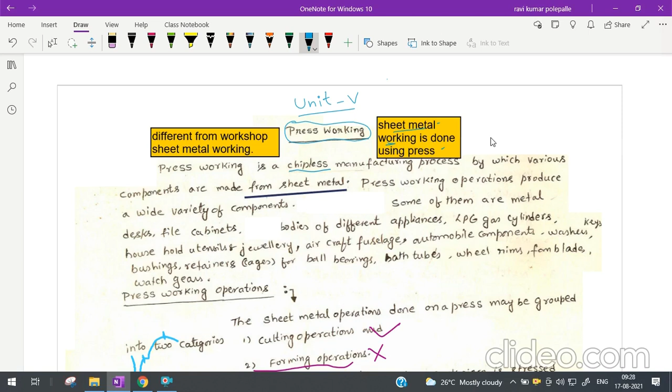This press working process is different from sheet metal working in a workshop. The chief difference is that we carry out this sheet metal working using a machine which we call a press.

Press working operations produce a variety of components: metal desks, file cabinets, bodies of different appliances, LPG gas cylinders, keys, household utensils, jewelry, aircraft fuselage, automobile components, washers, bushings, retainers or cages for ball bearings, bathtubs, wheel rims, fan blades, watch gears, etc.

So many different types of components - wherever sheet metal is involved, we can make them using the press working process.

What are the different press working operations? We can categorize them into two types: the first is die cutting operations, and the second is forming operations.

The basic difference between these two is that in die cutting operations, cutting action is the main activity. To cut the sheet metal along a particular profile or contour, the workpiece must be stressed beyond its ultimate strength.

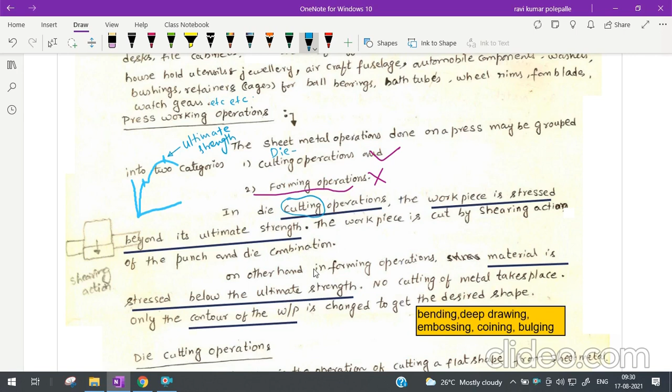In die cutting operations, we have to reach the ultimate strength value. On the other hand, in forming operations, we never go up to ultimate strength - our operations may cross the yield strength, but we never reach the ultimate strength. That is the main difference.

Let us look at the different die cutting operations. But before that, let us note the forming operations. Some of them are bending, deep drawing or cup drawing, embossing, coining, bulging, and also spinning.

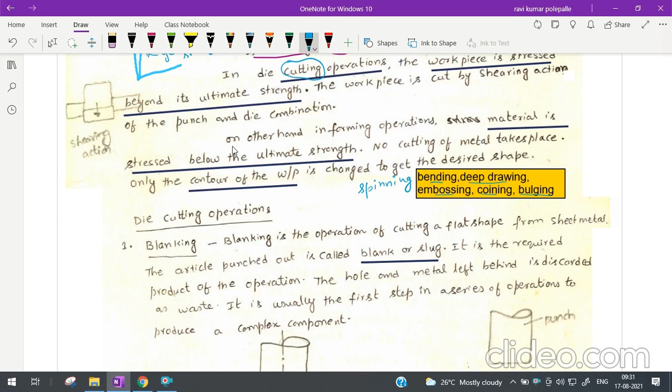Spinning can be hot spinning or cold spinning, and it also comes into the category of forming operations. Now let us look at the die cutting operations.

There are different die cutting operations. The primary or first operation of importance is the blanking operation, where a flat shape is produced from the sheet metal.

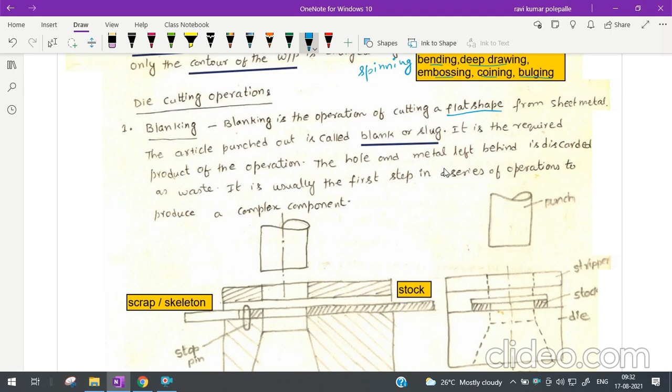This punched-out article is called a blank or slug. The hole and the metal left over is discarded as waste, which we also call scrap. Blanking is usually the first operation in a series of operations to produce a complex component.

Looking at the basic diagram: to the right side, the material being pushed inside is called stock. The material that falls down is called blank, also known as slug. What comes out to the left side is called scrap or skeleton.

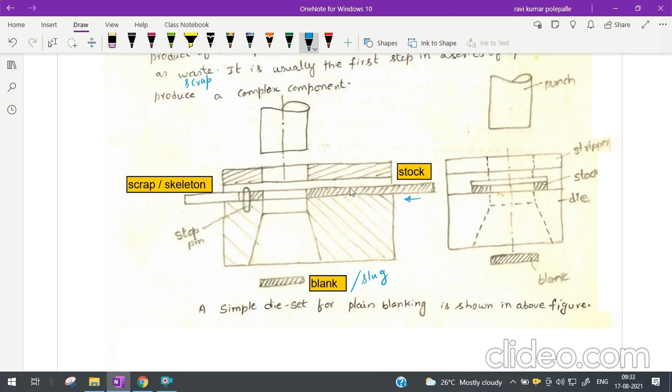Piercing operation is a cutting operation where holes are produced in sheet metal. Punching is similar to blanking, except that in punching, the hole with its skeleton is the desired product, and the material punched out is the waste.

So you can see the difference: in piercing, the material punched out is the scrap, and the remaining material is our product. On the other hand, in blanking operation, what is punched out is the product, and what remains is the scrap.

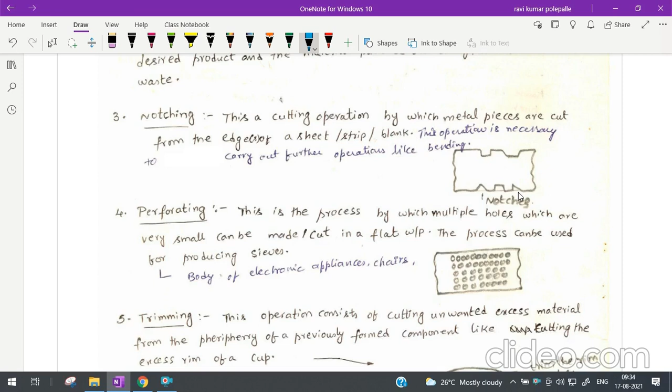Next is notching - the operation where metal pieces are cut from the edges of the sheet metal. This operation is necessary to carry out further operations like bending. On the edge, we may cut off some portion, and we call these notches, with the operation called notching.

Next is perforating - the process where multiple small-sized holes are produced. This process can be used for producing sieves, and additionally for producing bodies of electronic appliances, chairs, etc., where perforations are made.

So perforations are made for good or easy circulation, right?

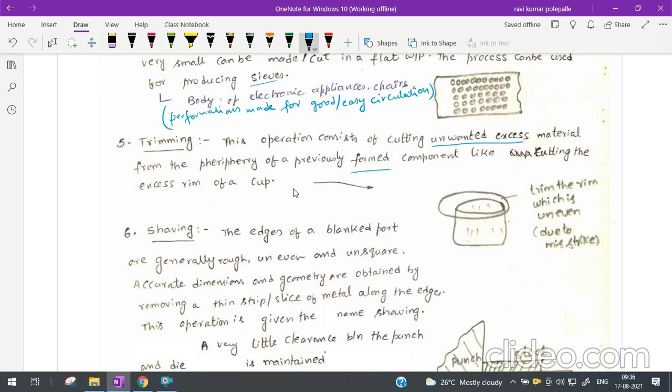Next, trimming. This is an operation where excess material is removed from the periphery of a formed component. On the formed component, you are going to remove excess unwanted material. For example, if I look at a cup, it has a rim which is uneven due to misstrike. Misstrike means the punch does not hit exactly at the center of the disc; instead, it is offset. So in that situation, you have a rim which is non-uniform, and such a rim has to be removed. That operation is called trimming.

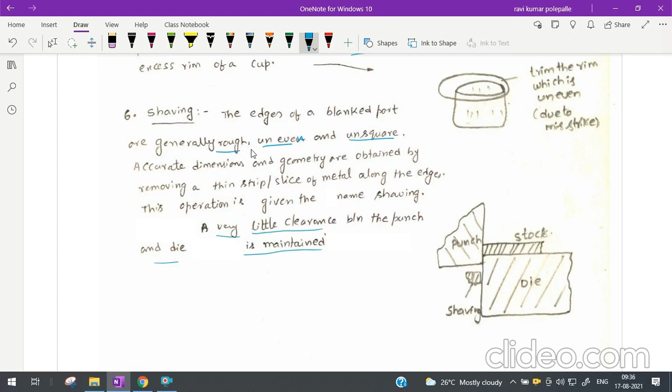Next is shaving. The edges of a blanked part are often rough, uneven and unsquare. So when we require accurate dimensions and geometry, we have to remove a thin strip or slice of the metal along the edges. That operation is called shaving. It has to be understood that a very small clearance between the punch and die is to be maintained, because this is a precision operation where we obtain smooth, square edges.

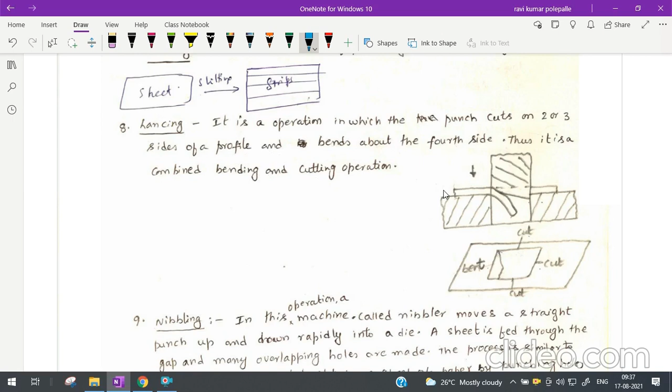Next, slitting. Slitting is the operation of producing thin strips throughout the workpiece. Lancing is an operation in which the punch cuts on 3 or 4 sides, or at least 2 or 3 sides of the profile, and bends about the 4th side. Thus it is a combined bending and cutting operation. The punch moves down, cuts on three sides, and on the fourth side produces a bend. So this is a bent portion, known as lancing.

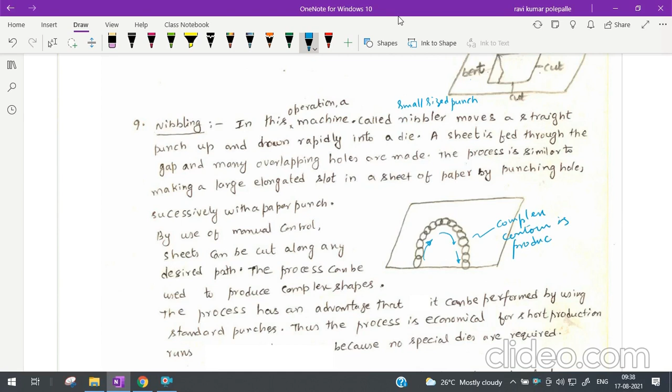Next, nibbling. This is an operation where you move a small punch, which we call a nibbler. It continuously moves up and down. The sheet is fed through the gap, and many overlapping holes are produced in this manner. The nibbler moves along a path and makes multiple overlapping holes. On account of this, it is possible to punch a contour using a nibbler where the shape is complex. So a complex contour is produced, and this is the operation we call nibbling.

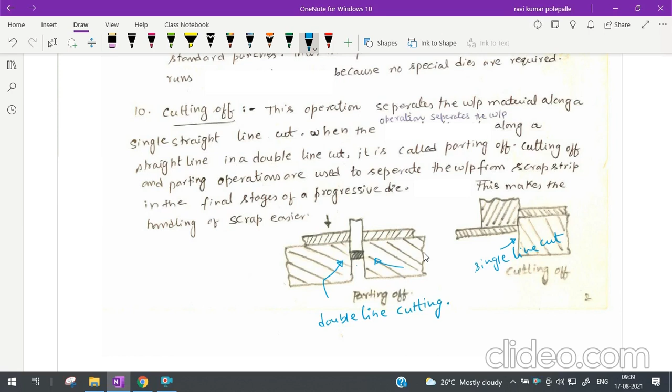Next we have the operation cutting off. This is an operation where separation of material takes place along a single line, so this is called single line cutting, and that is called cutting off. On the other hand, we may have double line cutting, where material is cut along two places; that is called parting off. So this is a sort of double line cutting. These cutting off and parting off operations are required in the last stages of cutting.

When we talk about materials suitable for press working, we generally go for soft materials, not too hard. We should differentiate materials based upon whether it is a die cutting operation or forming operation. Generally low carbon steels and non-ferrous metals like copper and its alloys, aluminum, titanium, zinc, etc. are more preferred for press working. The starting material is in the form of sheet or strip, with thickness from 1/10 of a mm to 8 mm. During press working, the sheet wall thickness is generally constant and varies only by a small amount. The metal must be free from scales before sheet metal working; the scale can be removed by pickling.

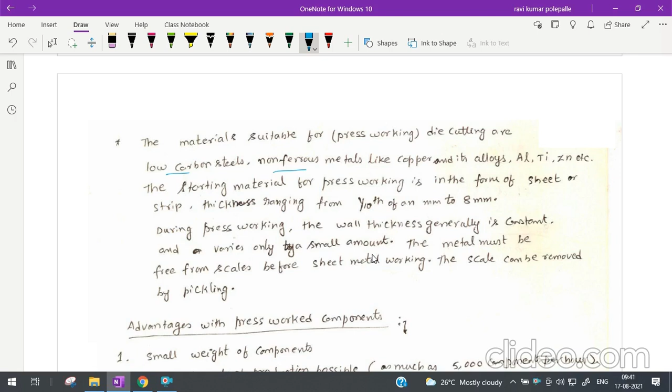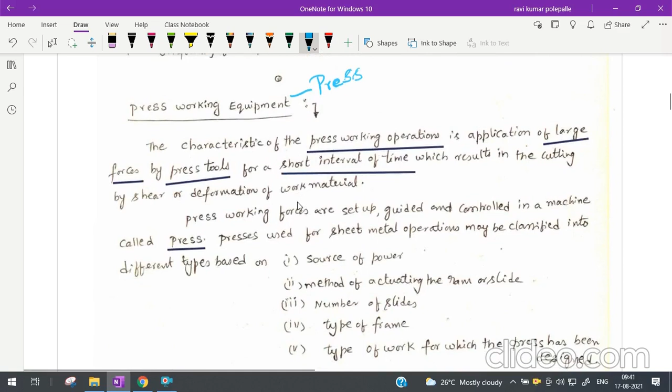When we talk about the advantages of press working components: small weight of the components, very high rate of production possible, as much as some 5,000 components per hour, lesser labor requirement, higher utilization of machine, and finally low production cost. Also good size and shape accuracy, which generally does not require any further machining, and lastly, uniformity of components. Next, press working equipment.

When we talk about the principal machine used in press working, we call it a press. The requirement of a press is to supply a large amount of force on the press tools, that means tools attached to the press, for a short interval of time, which results in cutting by shear or deformation, that means purely plastic deformation of the work material.

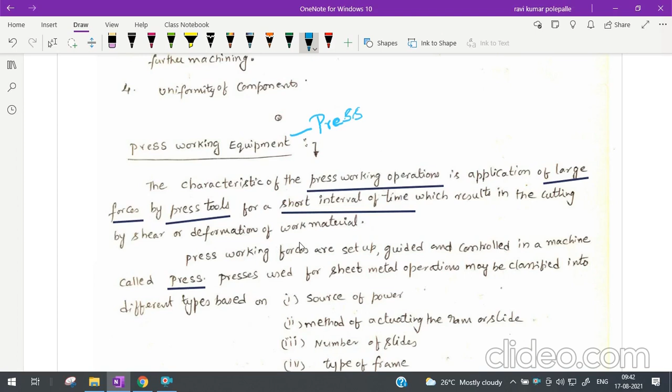The press should have facility to set up the forces and guide them in a controlled manner. There are different issues related to press, such as source of power, number of slides, and type of frame.

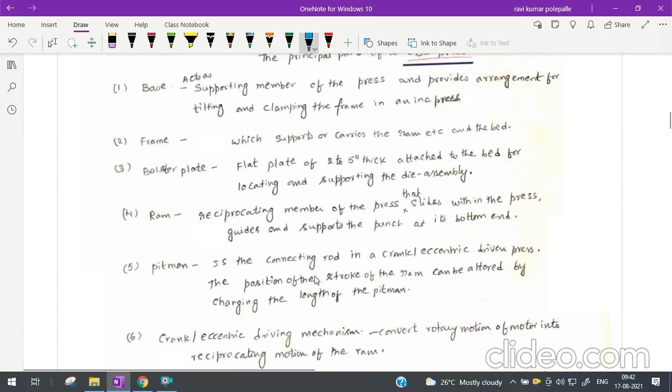Here you can see a typical press, which we call OBI press, open back inclinable press. This OBI press has so many parts. You can find a flywheel which stores the energy, and it is connected to a motor. From the motor, it receives energy and keeps on rotating, storing the energy. Whenever the ram moves down, the energy will be supplied by this flywheel.

You have ram to which the punch die assembly is attached. Next we have a gap at the center, which is provided to push away the component from front to back if necessary.

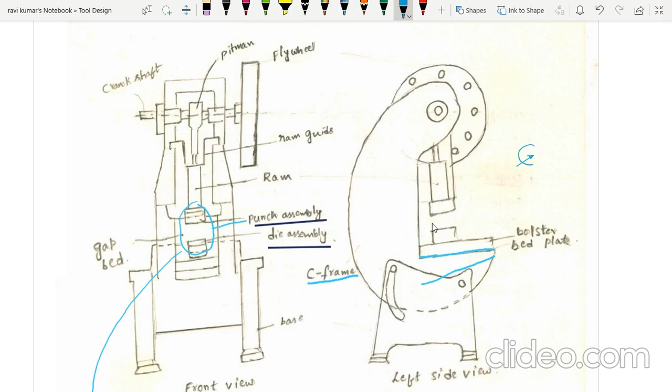Same way, we have the press more number of times as C type of press. We call it a C frame, which permits us to feed the components from this side, something like a C shape. Into this C, from left to right or right to left, we can push the component as the work is over, so as to get the next component. Further, we can find the RAM and the die set, that means punch and die assembly.

We have this frame which is adjustable. Actually it is called open back inclinable press, meaning its back is open. Further, it is inclinable, so we have a slotted screw arrangement for tilting the machine.

Next we shall talk about a simple die set. These are the parts of the die set. We can find a punch and a die as the two main parts. This punch and die block together act as cutting tools. In addition, we have arrangement to move the punch down by the movement of the ram in a controlled manner, for which we have guide bushings. The punch holder moves around this guide post with the help of this guide bushing.

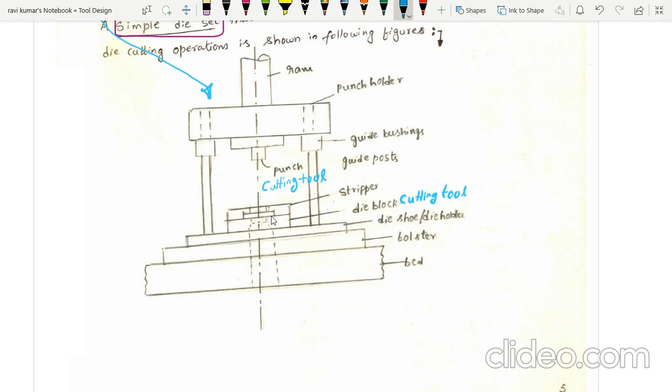Regarding the other parts, we have a die block fixed on the die holder or die shoe, below which we have a thick plate called the bolster plate, and below it we have the machine bed. We also have stripper and many other parts. This is only a simple die set.

Now let us talk about the shearing action in die cutting operations.

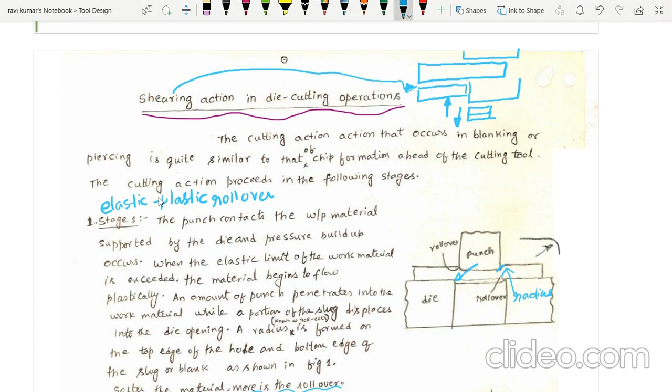Let us continue with the discussion on the shearing action in die cutting operations. The cutting action that occurs in blanking and piercing is similar to that of chip formation ahead of the cutting tool. The cutting action proceeds in the following stages.

We call this shearing action. The reason is we have a press with a punch which moves down over the die support, where the sheet metal is placed. There is a sort of sliding action at the place where the shearing takes place.

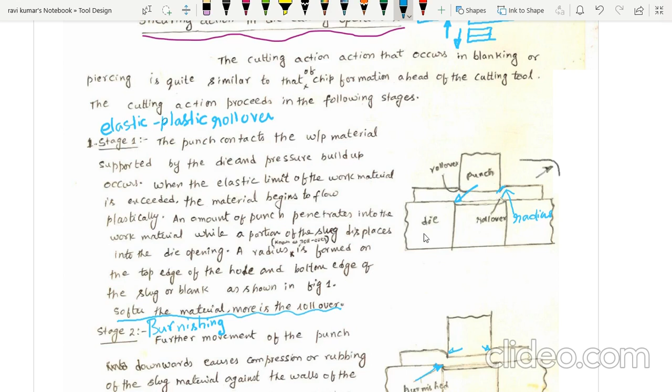Actually it proceeds in stages. If you look at the stages, the first stage we call elastic-plastic rollover. In this stage, we find that a sort of radius is formed around the punch corner as well as the die corner in the sheet metal, called the rollover radius. This radius will be larger when the clearance is larger. Similarly, if the material is more plastic or soft, we find this rollover radius to be a larger value.

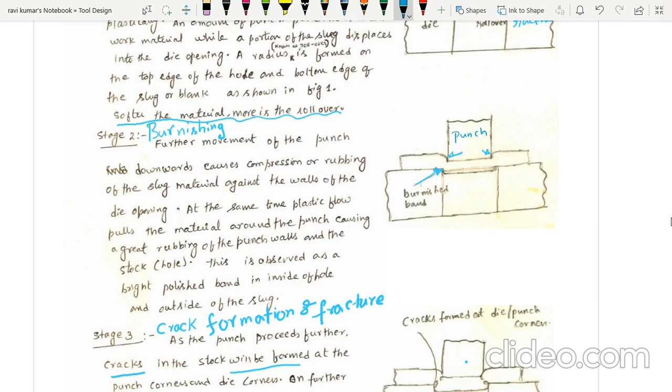The second stage is called burnishing. In this stage, there is a sort of penetration of the punch into the die block, into the sheet metal. Similarly, there is rubbing of the sheet metal by the die walls, as the work material penetrates and moves more closely into the die opening. This is known as burnishing, and it will be observed as a bright polished band inside the hole of the stock material produced, as well as on the outside of the slug.

Next, crack formation and fracture.

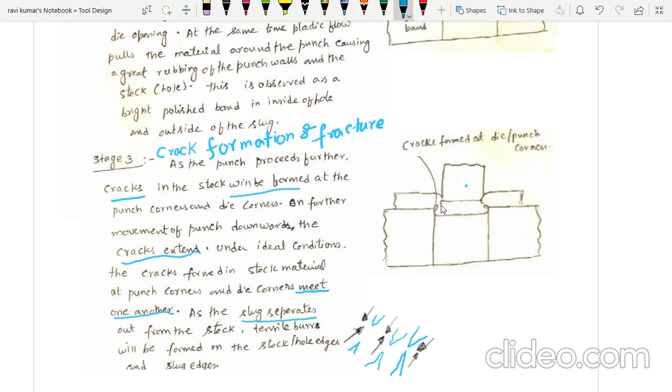As the punch proceeds further down, cracks are produced at the corners. Around the punch corners in the sheet metal, there is a sort of crack formation. The cracks are far apart in the initial condition, and as the punch moves down further, the cracks proceed towards one another when the clearances and other conditions are favorable. Under favorable conditions, the two cracks approach one another very fast and separation of the material takes place.

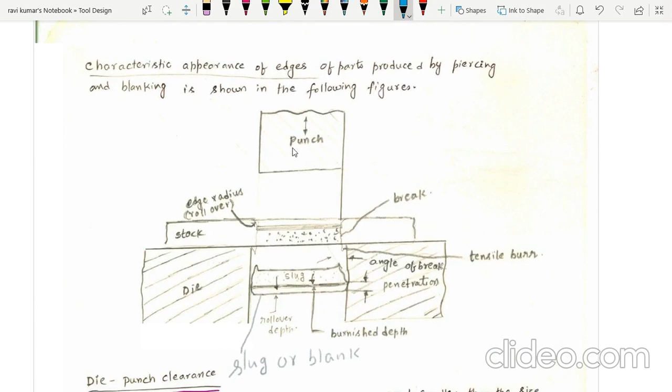Slug drops into the die opening while stock material is ready to be disposed. This is the characteristic appearance of the edges of parts produced by piercing and blanking operations. As the punch proceeds down, it produces a surface something like this. Right, this is how the appearance will be.

One may observe three important regions which are characteristic of the three stages in cutting. First we observe a rollover radius, both on the hole that is produced as well as the slug. We call this the rollover depth. Then we find a burnished region, this polished, darkened region, which is nothing but the burnished band.

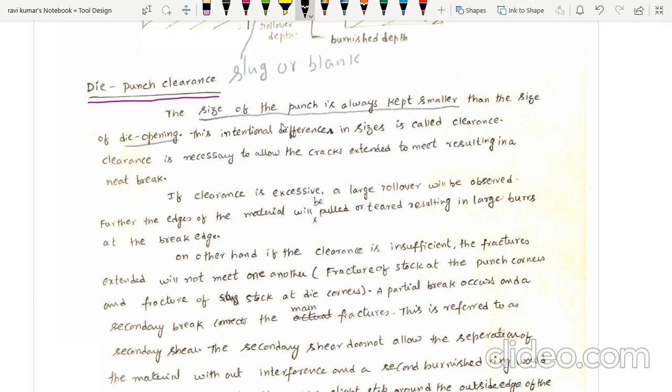Next, let us talk about the die punch clearance. All of us accept that the size of the punch is always kept smaller than the size of the die opening. This intentional difference we call clearance. Clearance is necessary to allow the cracks to extend and meet one another so that the break is neat or clean.

If the clearance is excessive, what happens? Simple, excessive rollover shall be observed. So when clearance is excessive, the rollover observed shall be excessive. Further, edges of the material will be pulled or torn, meaning we are going to find large burrs.

On the other hand, when clearance is insufficient, what happens? We find that the fractures extended will not meet one another properly. The crack formed around the punch corner in the stock material and the crack formed around the die corner do not proceed towards one another. They may get offset and proceed individually.

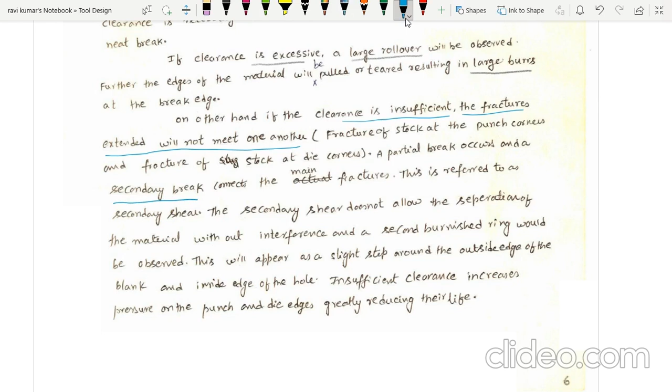Then a secondary break, which we call secondary break, is necessary to connect these two cracks. This is called secondary shear, and this is not at all expected. We find a second burnished ring as well as a sort of interference of the material. This insufficient clearance increases pressure on the punch and die edges, greatly reducing their life. So this is not at all expected.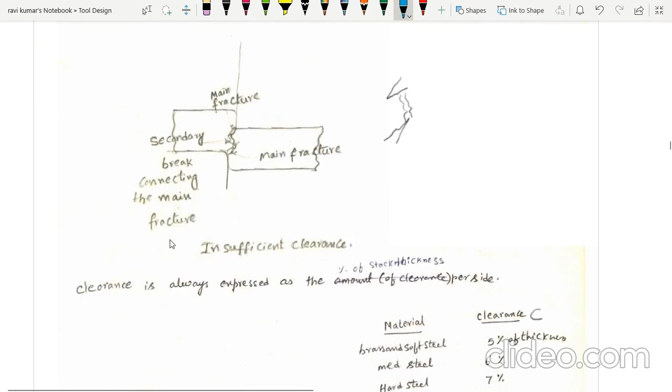So this is insufficient clearance, and this is excessive clearance. We find a primary crack, and this is another primary crack. They are not moving towards one another, so they are offset. You have a secondary crack or secondary break which needs to connect them because they are proceeding individually, and they are not expected to meet in a normal manner.

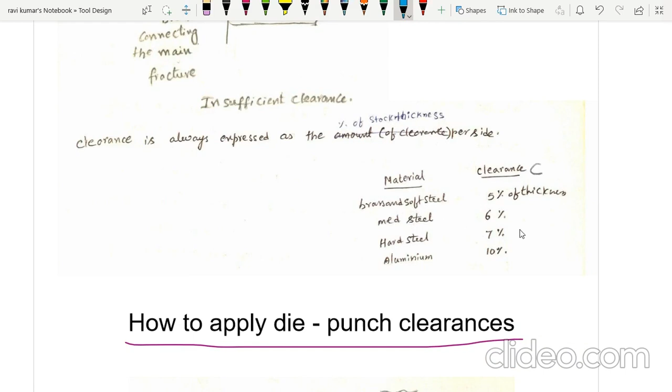When we talk about the amount of clearance, we provide clearance as a percentage of stock thickness. Generally, 5 to 10% of stock thickness per side is enough.

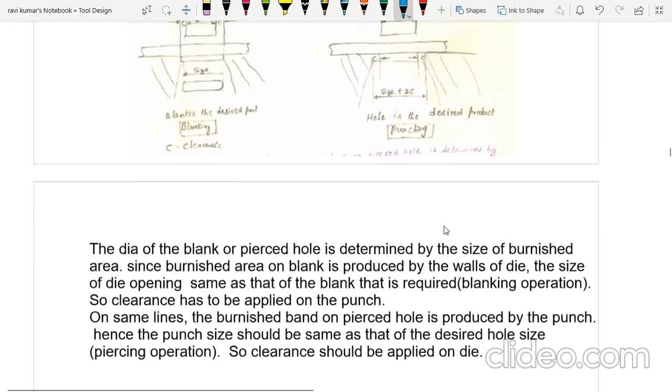Next, how to apply the die punch clearances? The die punch clearances are applied depending upon the name or type of operation. In blanking operation, we apply clearance to the punch because the size of the die opening will correspond to the size of the blank. That means the punch is made smaller than the blank size.

On the other hand, in piercing operation, the piercing hole is decided by the size of the punch. Therefore, the die opening has to be excessive compared with the punch size, or simply we may write it with respect to blank size.

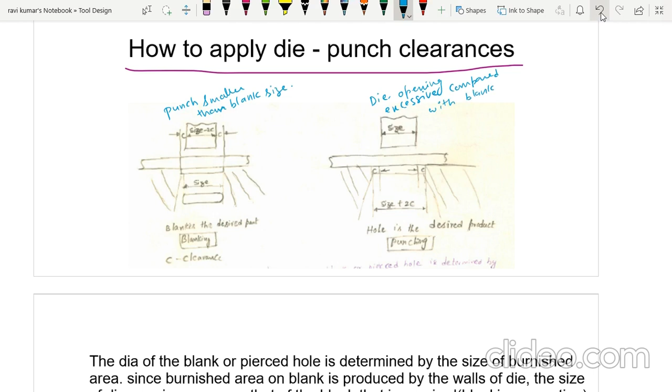So the die opening is excessive compared with the blank size, right? So this is how we apply the clearance.

So there is another clearance which we call angular clearance. What is this angular clearance? You may observe that the die walls are not straight. Part of the die wall is straight, and from there it is tapered down.

This tapering is done because whenever the punch pushes the stock material into the die opening, there is a sort of elastic deformation. Once the punch releases from the cutting action, there is going to be a sort of elastic recovery, and therefore we find that the blank increases in size.

So we find that the slug or the blank expands. This expansion in blank dimensions will make the blank stick or cling against the walls of the die opening if it is straight. If you provide a taper, simply the blank, on account of the elastic recovery, will not be able to hold against the walls because it's tapered, and it will simply drop down.

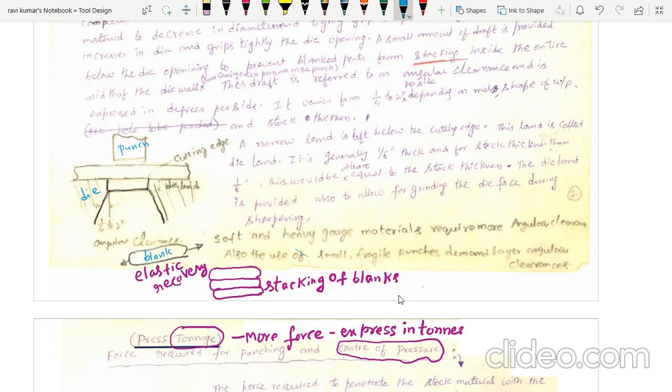This also prevents stacking of the blanks - that means blanks placed one over the other - and an increase in the punch force. All such types of problems are eliminated.

Okay, so the next discussion is about press tonnage. We use the word tonnage because the amount of force which we require is in tons - that means a large amount of force is required to penetrate the stock material.

If we try to calculate the numerical value of that force, we write it as S P T. S stands for the ultimate shear strength of the material, P stands for the perimeter, and T is the thickness of the stock material. So this much amount of force is required, right?

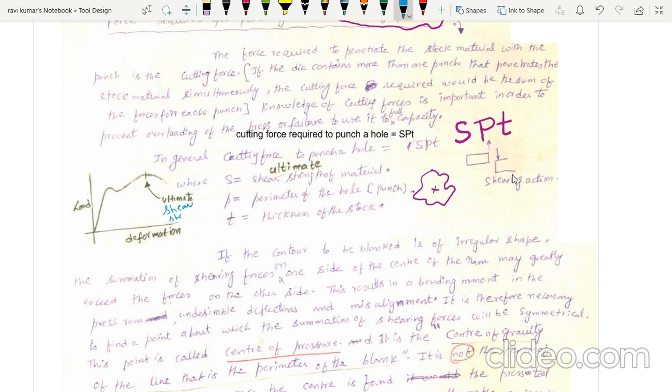One should definitely remember that S stands for the ultimate shear strength. It is not ultimate tensile strength. It is ultimate shear strength of the material.

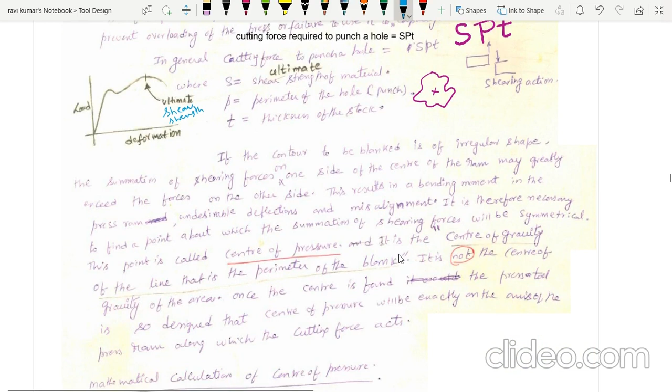When we talk about the force after it has been calculated, we should be aware of where we have to apply this force. The place where we have to apply this force is called the center of pressure. This center of pressure is nothing but the center of gravity of the line, that is the perimeter of the blank. It is not the center of gravity of the area.

Once the center is found, the press tool is so designed that the center of pressure will be exactly on the axis of the press ram along which the cutting force acts.

If we don't apply the force along this center of pressure point, there is going to be an imbalance of forces. So we may find a sort of bending moment, undesirable deflections, and misalignment. These are all different types of troubles which we are likely to face.

When it comes to calculation of center of pressure, these are the different steps. First, draw the outline of the portion to be cut. Draw the x-axis and y-axis at right angles at a convenient position. When there is symmetry, we can make the x-axis or y-axis pass through the axis of symmetry or line of symmetry.

Next, divide the cutting edges to be cut into simple line elements. Please understand, these are line elements, not area elements. Next, find the length of each of these lines.

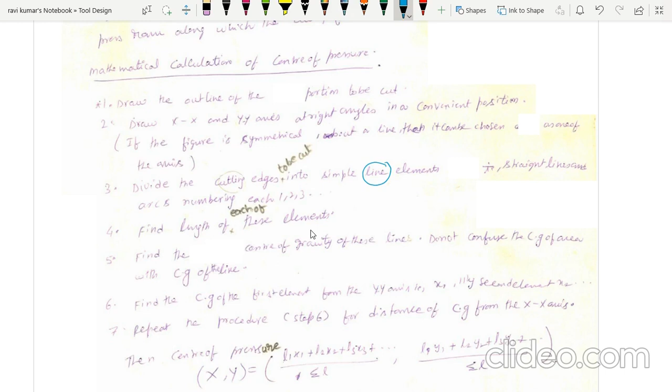Next, find the center of gravity of each of these lines. Do not confuse this with the center of gravity of area.

Next, find the center of gravity of the first element from the y-y axis, which we call x. Similarly, for the first element we call it x1, for the second element x2, and so on.

When we apply the formula, this is the formula for center of pressure: X, Y is equal to L1 x1 plus L2 x2 plus L3 x3, etc., divided by L1 plus L2 plus L3. Next, L1 y1 plus L2 y2 plus L3 y3, etc., divided by L1 plus L2 plus L3 and so on.

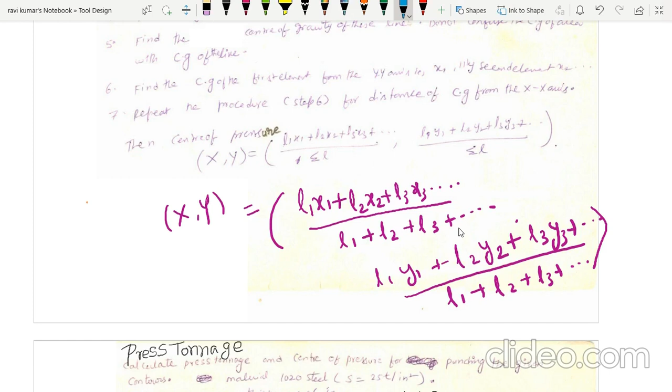So we may look at this example to see how we have calculated the center of pressure.

Next, when we talk about the methods of reducing punch forces, the methods are multiple. The first method is providing draft on the punch or dies.

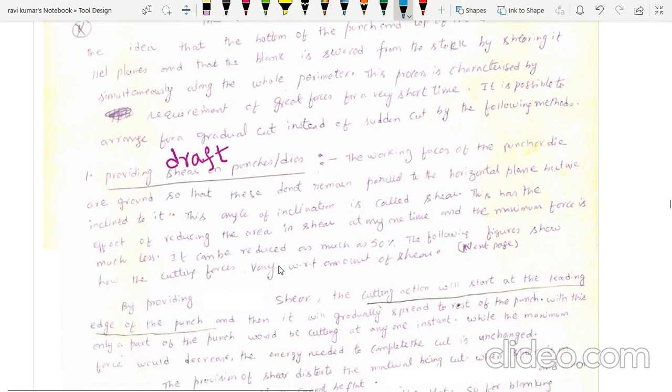This is how they look like. Instead of the punch face being straight, that means perpendicular to the axis, it is inclined. By doing this, we are able to reduce the load on the punch. Actually, the peak load is reduced, not the total force. The peak force is reduced because the cutting takes place gradually, not on the complete contour. Instead, it cuts gradually along the contour.

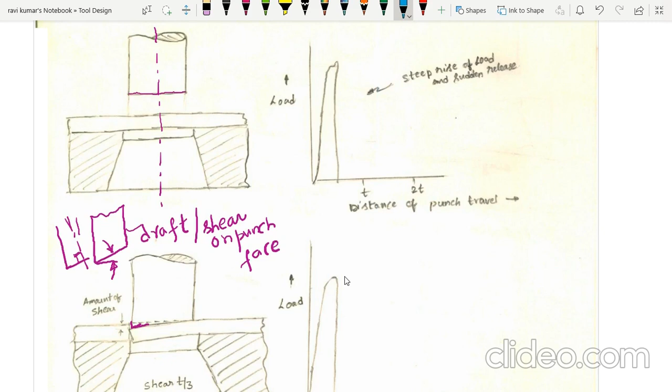We can provide different amounts of draft, say t by 2, t by 3, or even one time the thickness. In each case, the peak load is reduced and therefore the punch and die will have more life, but there is likely distortion of the workpiece. So the die opening or punch face may have a single draft or double draft, similarly convex or concave shapes.

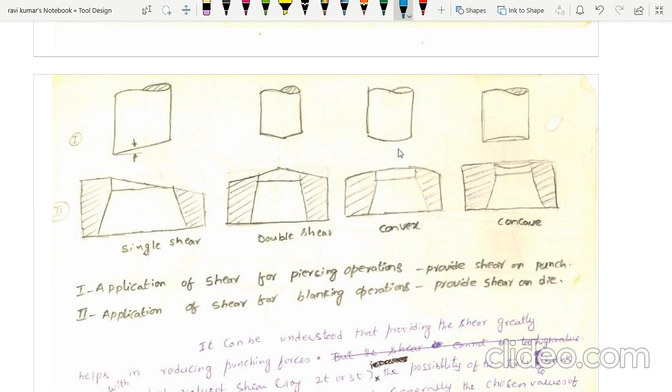Another way of reducing punch forces is staggering or stepping of punches. So punch 1, punch 2, punch 3 may be staggered, meaning once punch 1 completes the cutting, only then punch 2 enters, then punch 3 enters, and so on. This is the case when we have operations requiring progressive dies.

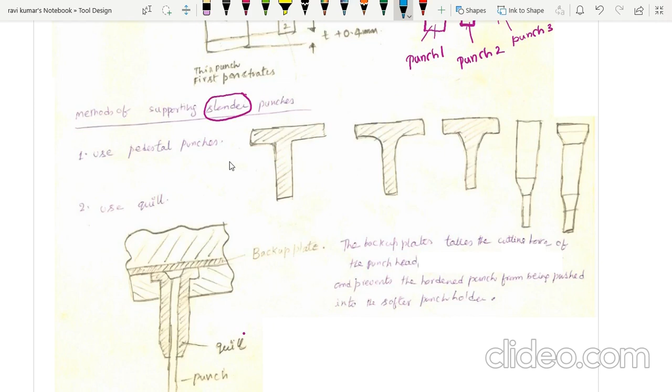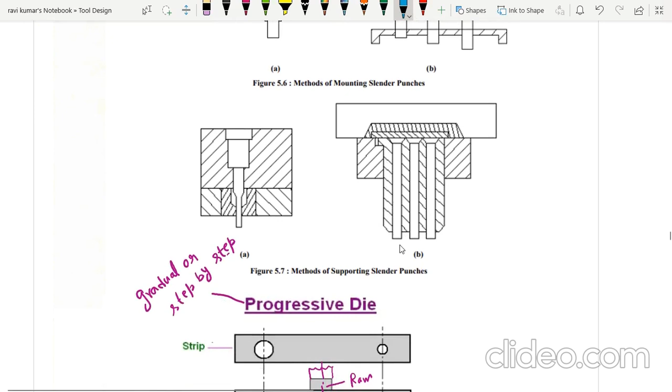Further, it has to be kept in mind that slender or thin punches have to be supported properly. So use pedestal punches, use a quill, that means a sort of supporting cylinder, likewise use a backup plate, or combine and group the punches. This is a case of staggering and mounting both, and this is a case of grouping the punches. So wherever possible, we can group these slender punches, and this will provide more support for them.

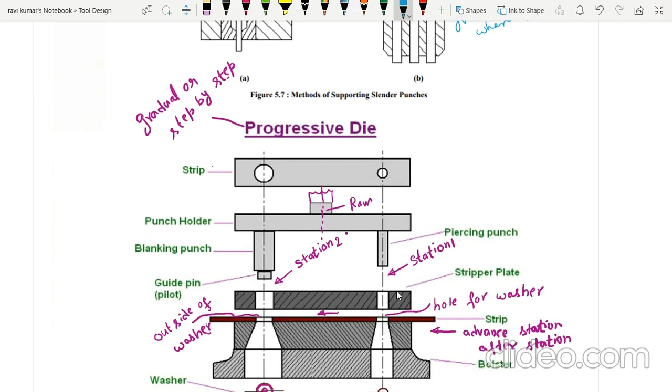So the next point of discussion is progressive and compound dies. What are these? By progressive, I mean gradual or step by step, so we produce the component step by step. Say we require a washer, something like shown in this diagram. We first need to produce a hole, and then we need to produce a separation from the stock material, meaning the outer contour is punched.

For this, we can have in one station the piercing punch and piercing die, and in the second station a blanking punch and blanking die. Once the sheet metal passes through station 1, the hole is punched, meaning the inner dimension is produced. Next, I push the stock material forward by a distance we call the advance. Now the blanking punch lowers, producing the outer contour of the component.

This is another example where multiple operations are performed across stations 1, 2, 3, 4. Station 1, a square hole is produced and three edges are cut - this is a trimming operation. Next, edges on this side are produced. Next, four holes are cut, and in the last station we perform a parting operation.

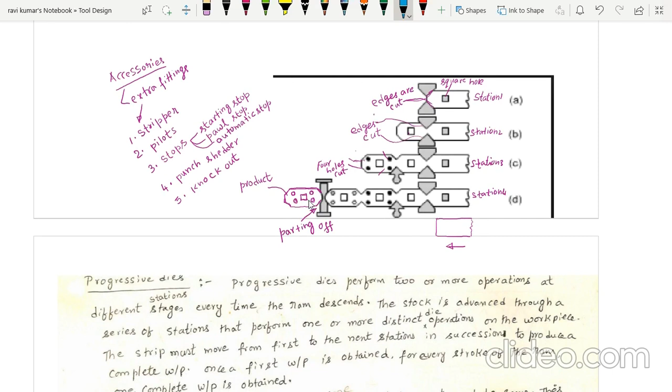So all these things produce components at a faster rate and in a controlled manner. This is called a progressive die.

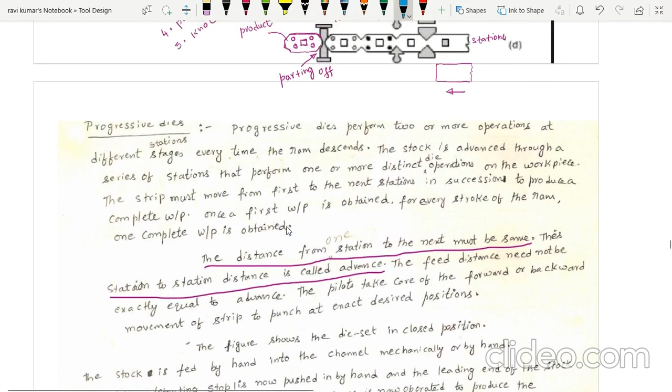For this, more accessories are required: extra fittings like stripper plate, pilots, stops - either a starting stop or an automatic stop - and sometimes a punch shedder and knockout. These two are particularly needed, and even more so in case of compound dies, which we'll discuss. This type of die set we call the progressive die set.

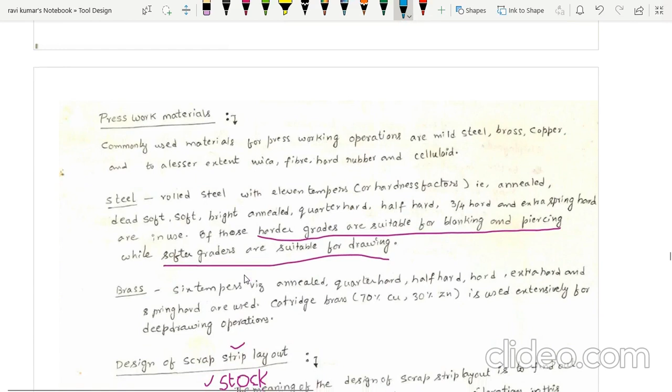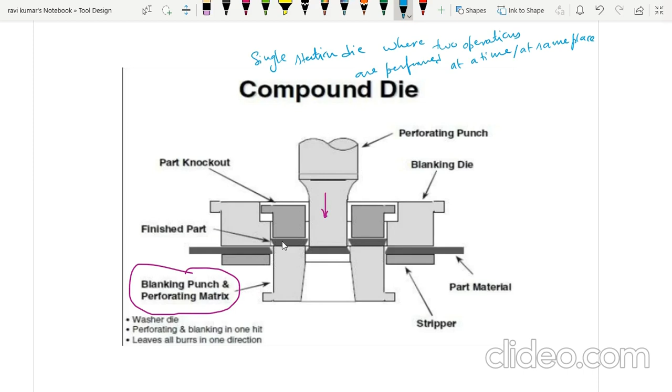So it's a single station die where two operations are performed at a time, at the same place. If you look at the construction, the center one is nothing but the perforating punch which will produce a hole, and it has some additional arrangement. This is the blanking punch and perforating die - the outer surface acts as punch for producing the blank, while the inner surface helps in producing the piercing faster.

Continuing the discussion about the compound die, let me repeat that these are single station dies where two or more operations are performed at a time and at the same place.

We may notice that the blanking punch's outer surface acts as the blanking punch, but the inner surface acts as a piercing die. This portion acts as the piercing die. Likewise, this part acts as the blanking die. You may find that the upper portion is the blanking die, and the inside portion acts as the outer surface, which acts as the blanking punch.

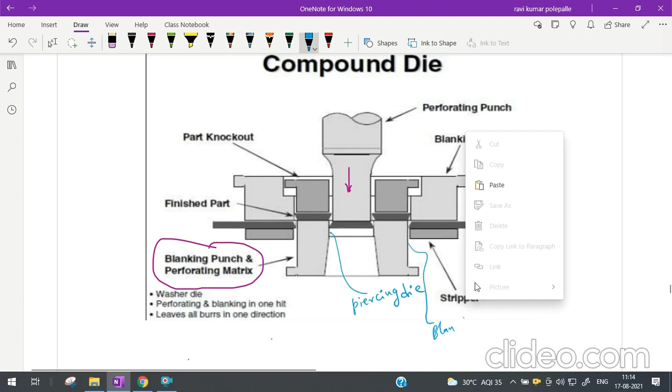So this is nothing but the blanking punch. The inner surface acts as the piercing die, and the outer surface acts as the blanking punch. That is a schematic diagram - you may not find all the information there, so this is a better diagram showing the blanking punch, piercing die, and blanking die.

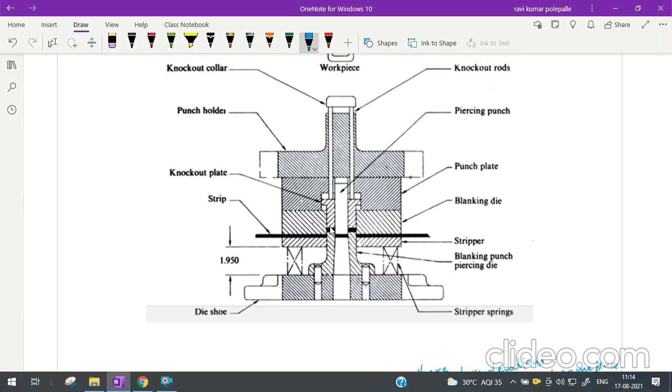In addition to this regular die and punch setup, we have knockout rods and knockout collar. The blank has to be pushed out by some additional means.

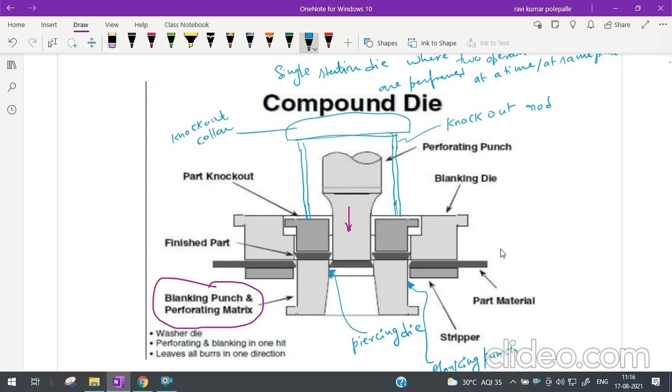One may understand that I have to push this knockout collar down so as to eject the components. This is done because the knockout collar's action is called knocking out - it has to knock out the component that has been produced. The reason is there is no tapered surface. For the piercing operation there is a tapered surface in the die, but for the outer blanking portion, we don't find any taper or draft. Therefore we have to additionally knock out the component which is sticking or clinging to the walls of the blanking die.

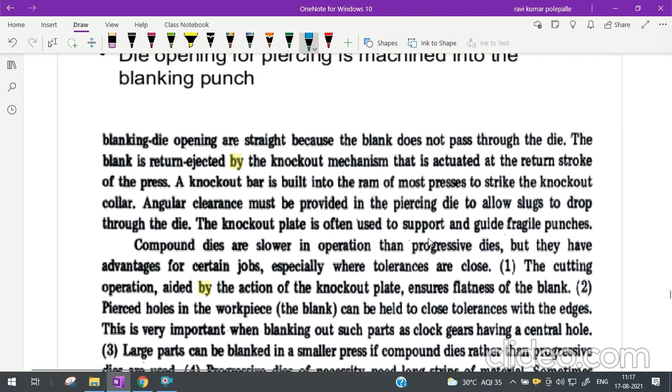This is not of much industrial importance, and may be preferred when we have loose blanks, or rather small pieces instead of a strip or a sheet.

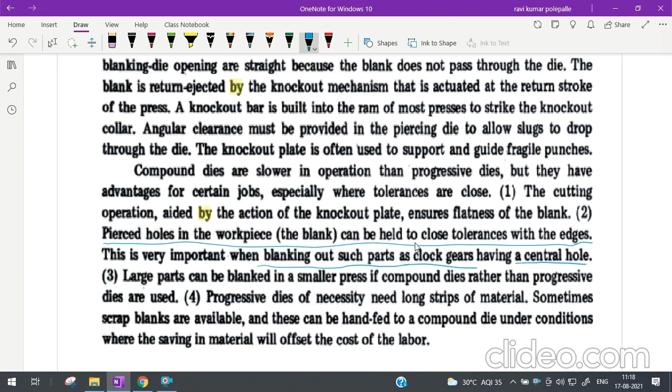Further, we have an advantage in this case - the dimensional accuracy is very good. Pierced holes can be held to close tolerance with the edges, since both inner and outer surfaces are cut at the same place, so the tolerances obtained are very good. For clock gears with a central hole and similar applications where tolerance and accuracy are important for small jobs, we can prefer the use of compound dies.

This completes the discussion on compound dies. Finally we may discuss the scrap strip layout - what is the scrap strip layout?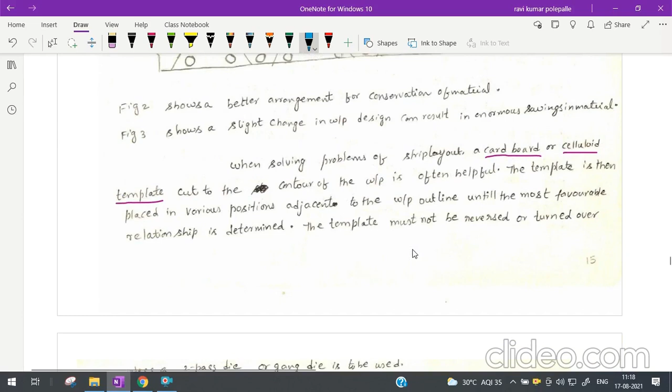The scrap strip layout is connected with proper usage of materials in progressive die setups. In progressive die setups, the component progressively improves in features as it passes from one station to the next. In such a case, the stock strip which we are feeding should maintain certain requirements - what are those requirements?

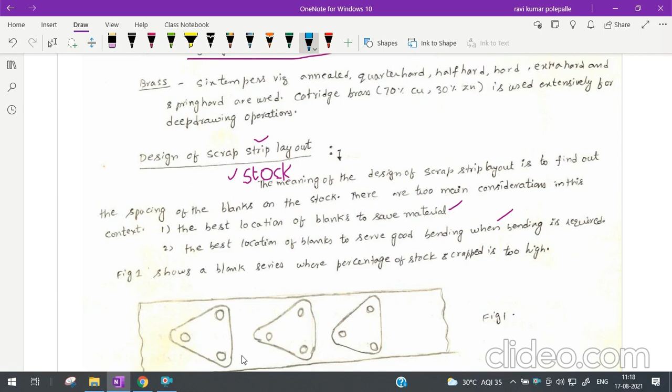You may look to the title, design of scrap strip layout. When I say strip, it is nothing but stock material. We have written it as scrap because finally what we get is scrap, and that scrap has to be minimized. The main considerations in designing the scrap strip layout are: choose the best location of blanks to save material, and choose the best location of blanks to serve good bending when bending or any further operations are required - the strip should still be useful.

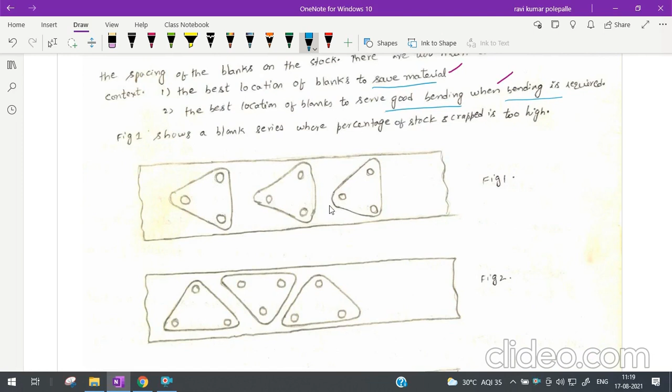You can look to the examples. I have arranged this cutting in this manner - look to the second case, here the scrap which we are getting is relatively less. Now look to the third case.

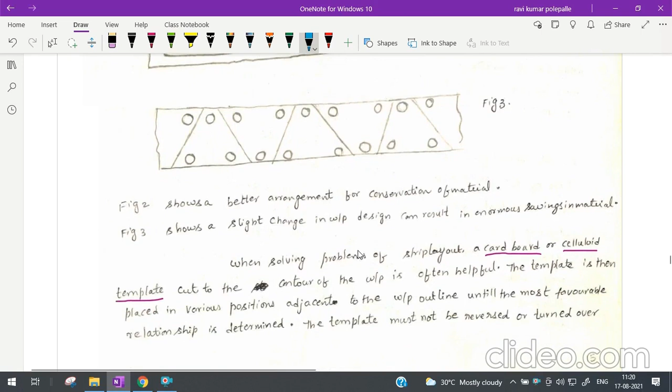Here I have changed the design. I am not using any rounding off at the corners, I am providing a straight corner instead. In this case, there is going to be enormous saving in the material, and I am going to get a very small amount of scrap.

How can I make this scrap strip layout? How can I carry this out? For this, I have to take a cardboard or celluloid template cut in the same manner as the contour of the workpiece. This template is placed in various positions adjacent to the workpiece outline until the most favorable relationship is obtained, meaning we put the template in different ways to generate alternative layouts.

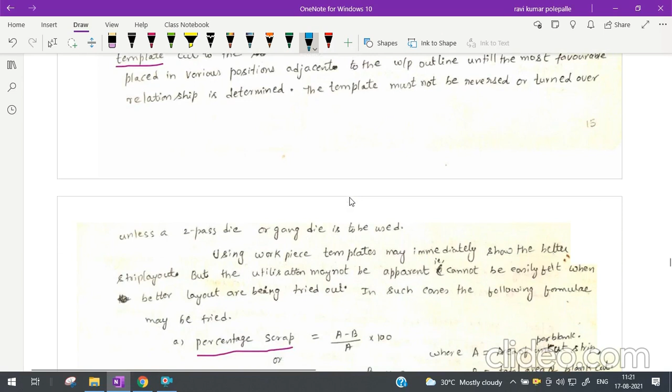Sometimes it is directly possible to understand which is the better one, but sometimes we find it more complicated, or we are not able to appreciate which is useful. For that we can go for mathematical calculations, and for a particular type of layout we can calculate the percentage scrap or percentage utilization.

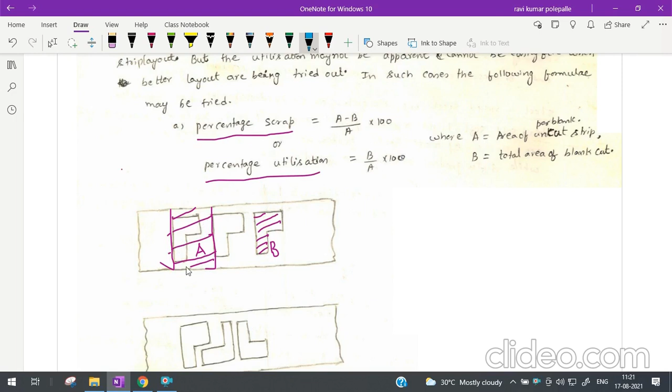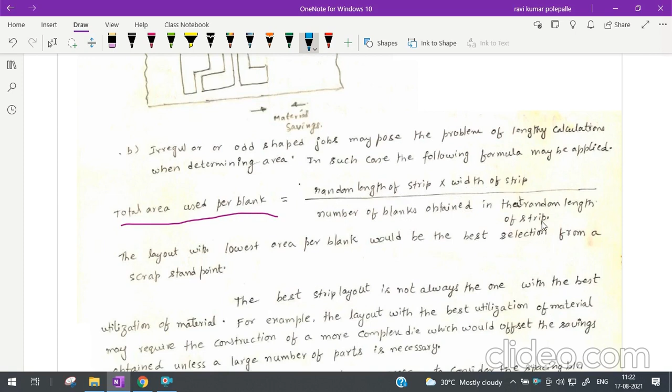When we have irregularly shaped jobs, the area calculation becomes more complicated. In such cases, we have to go to a formula: total area used per blank equals random length of the strip into width of the strip, divided by the number of blanks obtained in that random length of the strip. So the layout with the lowest area per blank will obviously become the best selection.

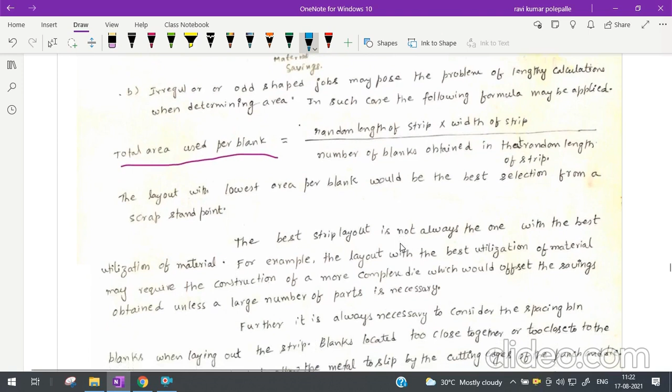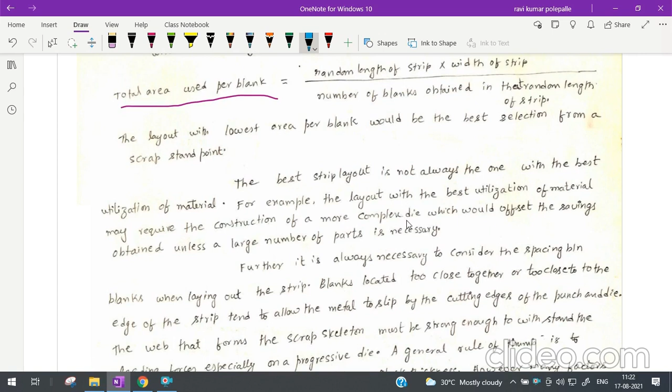When we talk about scrap strip layout, we can't say the best strip layout is simply the one which utilizes material in the best manner - it's not always like that. We have to look at the design of the die. For example, for the best utilization you may require a complex die, which means the initial investment becomes large. So we cannot go for such investment unless the number of components required is relatively large.

Further, when we make a design, we should be careful that the blanks are not located too close to one another or to the edge of the strip. If they are, they don't allow proper cutting; instead, they simply allow the metal to slip into the die opening.

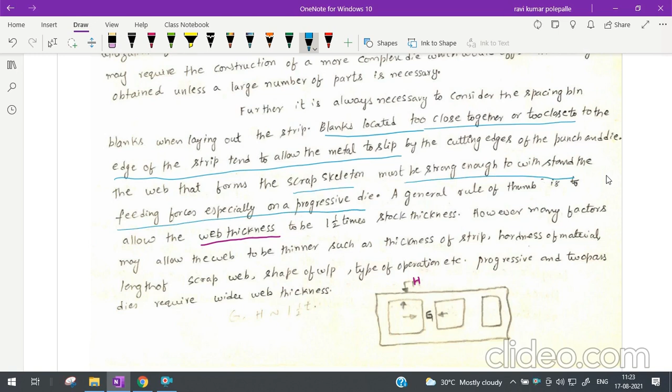Also, the scrap skeleton must be strong enough to withstand the feeding forces in a progressive die. Generally, the web thickness should be at least 1.5 times the stock thickness - this is a thumb rule. There are many other factors which decide web thickness as well as distance from the edge, such as hardness of the material, thickness of the strip, type of operation, whether it is a 2-pass die or single pass die, and so on.

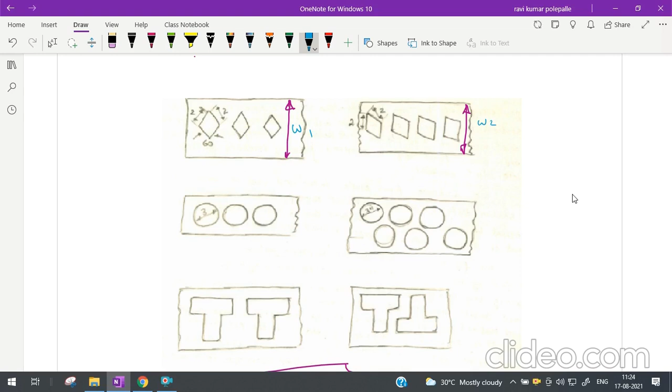Here you can find some optimization calculated and carried out so that you get a better strip layout. This layout wastes so much material, but here the width of the strip - say here it is W1, here the width is W2 - we find that just by changing the orientation, W2 is less than W1.

In the second case, instead of a single die, we are having two dies, so we are cutting along two rows. We may use a gang die, or we may have to use a 2-pass die. Just by increasing the width by a small amount, I am able to make more number of holes with a slight increase in the width of the strip. In this case we require a gang die.

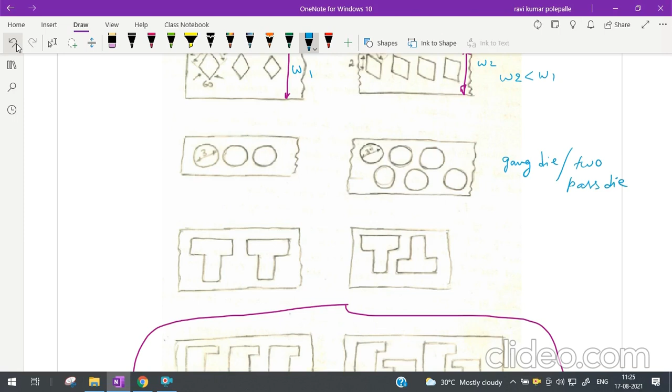Or we have to go for a 2-pass die, meaning feeding left to right and feeding right to left. Likewise you can look at this other case - here too we increase the width, but it's not much use compared with the third one. So these are all examples of optimizing the layout.